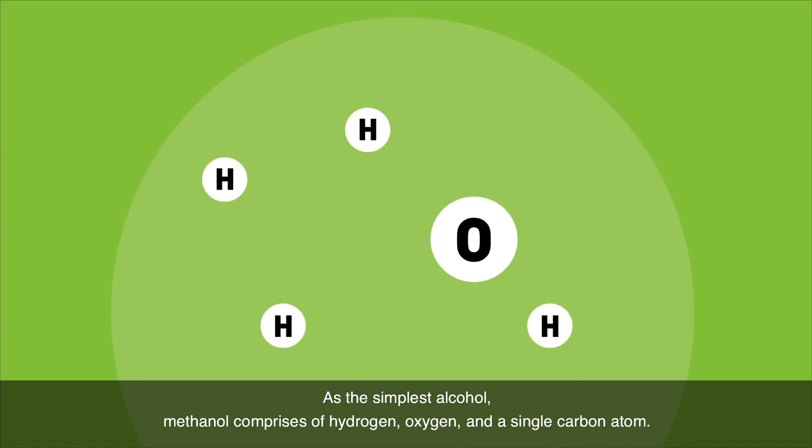In a fast-changing world, it is time to find innovative and efficient solutions to provide future-proof fuels. As the simplest alcohol, methanol comprises hydrogen, oxygen, and a single carbon atom. It has the highest hydrogen to carbon ratio of any liquid fuel. These chemical properties contribute to methanol's sustainability as a petrochemical feedstock and fuel.

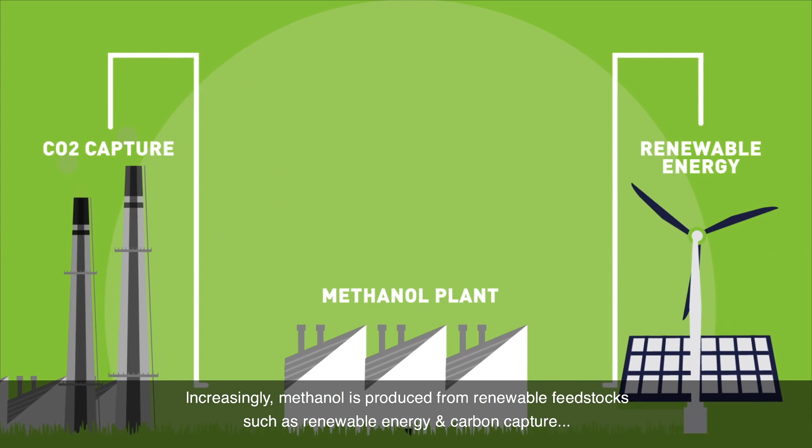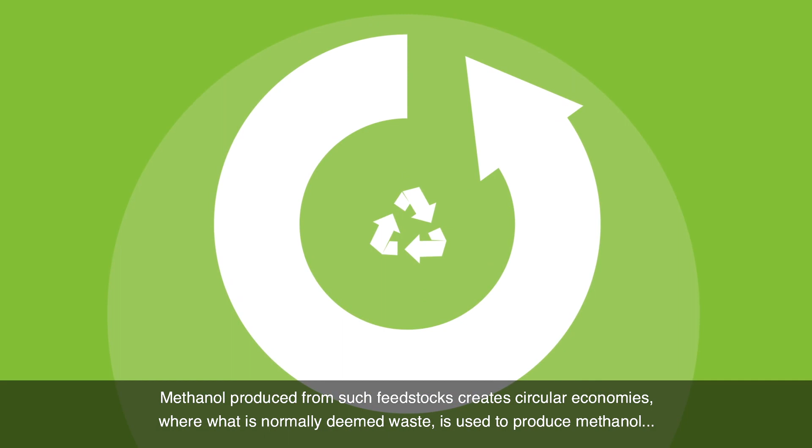Methanol is commonly produced from natural gas. Increasingly, methanol is produced from renewable feedstocks such as renewable energy and carbon capture, municipal waste, and agricultural waste. Methanol produced from such feedstocks creates circular economies, where what is normally deemed waste is used to produce methanol, a useful and higher value product. Such processes promote sustainability by creating value from waste and diversifying how waste is managed.

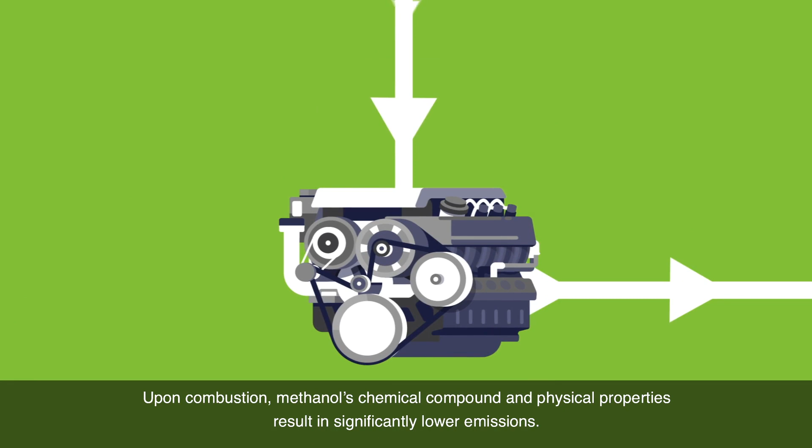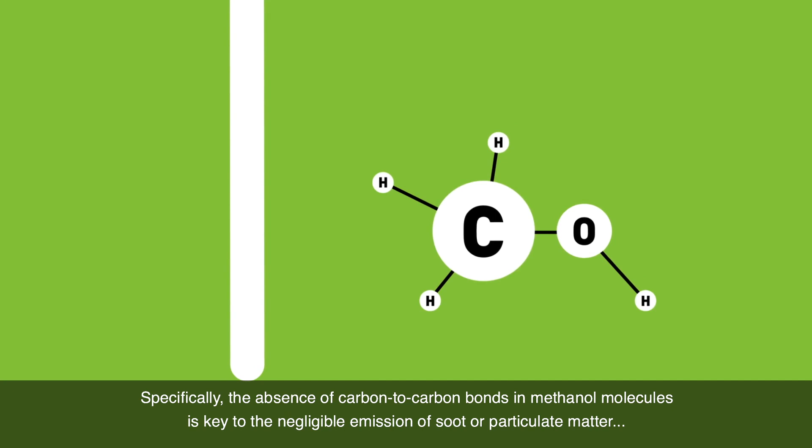Methanol is used to produce a wide range of ubiquitous products, such as materials for constructing houses, paints, plastics, car parts, and medical equipment such as personal protective equipment. When produced from renewable feedstocks, renewable methanol becomes a sustainable, net carbon neutral fuel, compliant with climate goals. Upon combustion, methanol's chemical compound and physical properties result in significantly lower emissions. Specifically, the absence of carbon-to-carbon bonds in methanol molecules is key to the negligible emission of soot or particulate matter, and the oxygen atom contributes to a fuller and cleaner combustion, making methanol an environment-friendly fuel that contributes to better air quality.

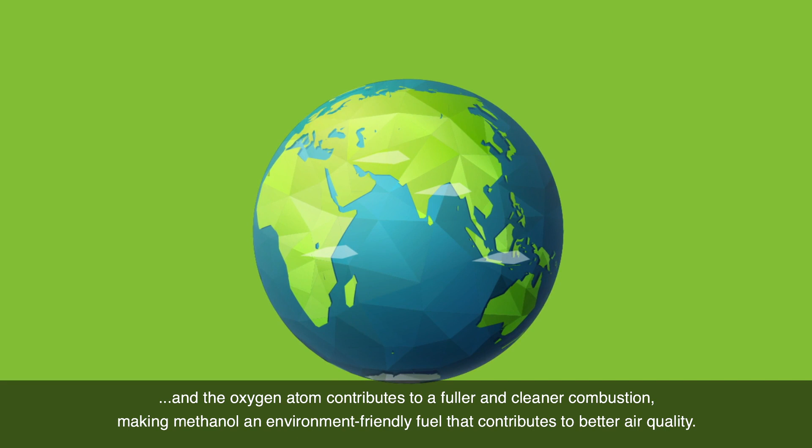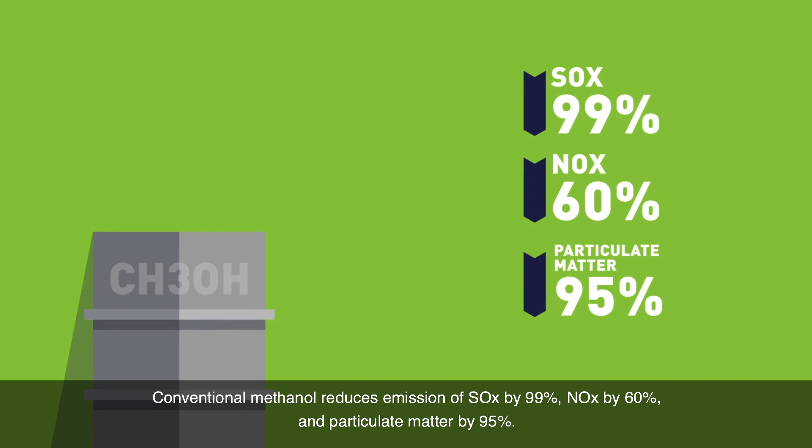As one of the most widely traded commodities in the world, methanol is available at more than 100 ports around the world. This reduces infrastructure costs for the marine industry to transition to methanol. Conventional methanol reduces emission of sulfur oxides by 99%, nitrogen oxides by 60%, and particulate matter by 95%. Net carbon neutral renewable methanol will meet the International Maritime Organization's goal of reducing greenhouse gas emissions by 50% by 2050.

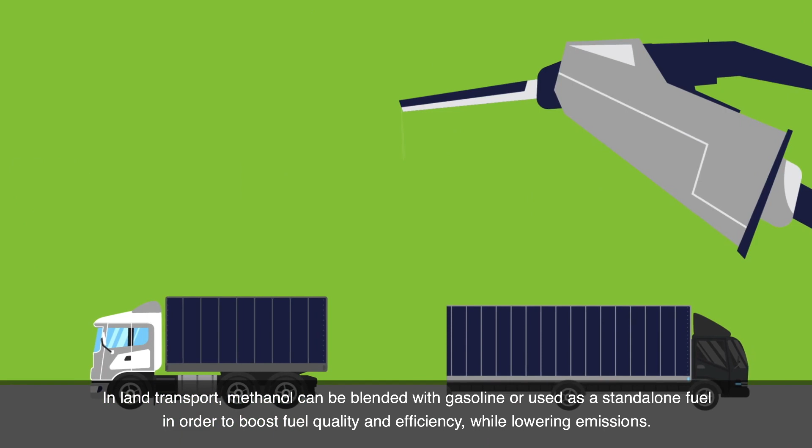In land transport, methanol can be blended with gasoline or used as a standalone fuel to boost fuel quality and efficiency while lowering emissions. To improve air quality with a cost-efficient solution, China is fueling land transport vehicles with pure methanol. Iceland is fueling a fleet of cars with renewable methanol. Italy is blending A20, a blend of methanol, ethanol and gasoline. This blend is being demonstrated in a car-sharing fleet with plans for it to be made available to consumers.

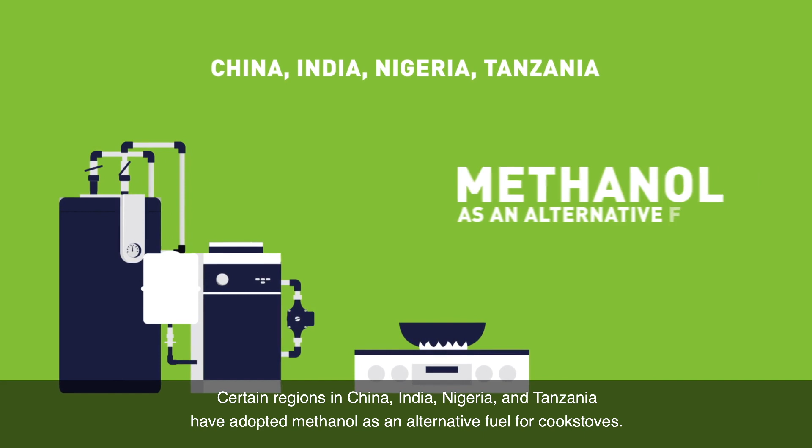The United States uses methanol regularly in motorsports. Certain regions in China, India, Nigeria and Tanzania have adopted methanol as an alternative fuel for cook stoves. Methanol's clean burning properties improve indoor air quality, lowering the risk of respiratory diseases.

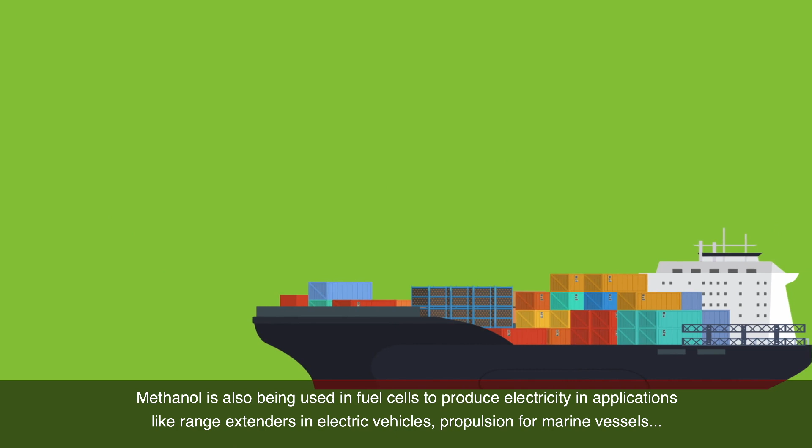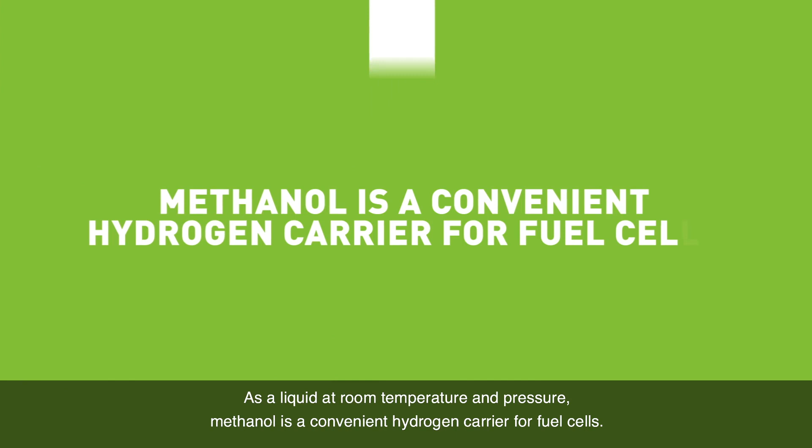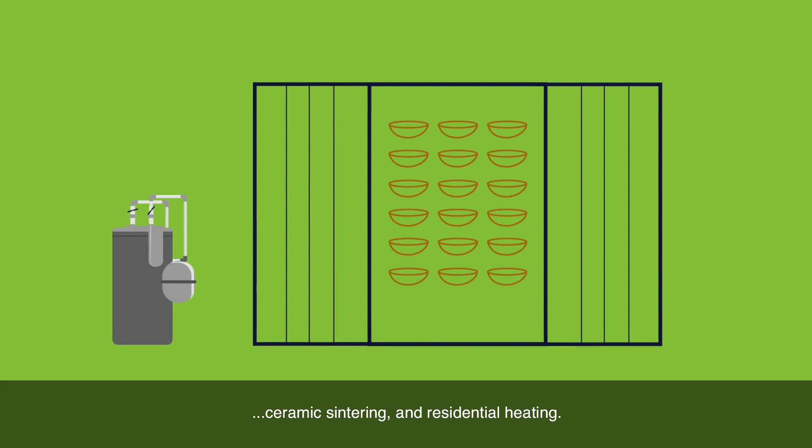Methanol is also being used in fuel cells to produce electricity in applications like range extenders in electric vehicles, propulsion for marine vessels, unmanned aerial vehicles, telecommunication towers, and military equipment. As a liquid at room temperature and pressure, methanol is a convenient hydrogen carrier for fuel cells. Increasingly, methanol is being used as a fuel in industrial boilers to produce heat or steam for the pharmaceutical and manufacturing industries. The methanol burner used in industrial boilers is also being used in other applications, such as producing heat for drying tea leaves or tobacco, ceramic sintering, and residential heating. As you can see, there are no shortages of available applications for methanol as a clean and net carbon-neutral fuel.

Methanol is the key to a more energy-efficient and clean future.

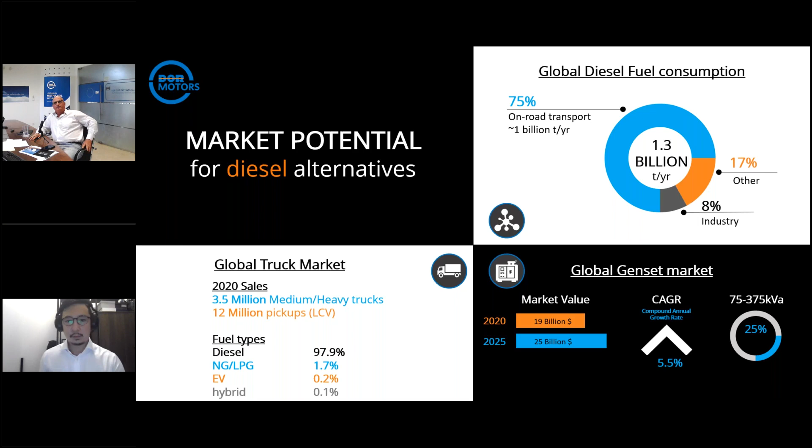Next slide. Okay, so, I mean, and still, as far as methanol, we do have to realize that there are some challenges to look into in order to make methanol an acceptable fuel. One has to do with the machinery, with the engine, and the other aspect is the chemistry.

We call it DOR mix. This is to say both the additives that we have to add to the methanol, as well as additives we have to add to the engine, like the special lubricants. And these I will now talk about.

I just lost you. Okay, sorry. So let's start with the generators. As I mentioned, it's a $20 billion market. And what we've done is we've been able to manufacture generators of both medium and small size, as well as large size generators that replace 100% diesel with 100% methanol.

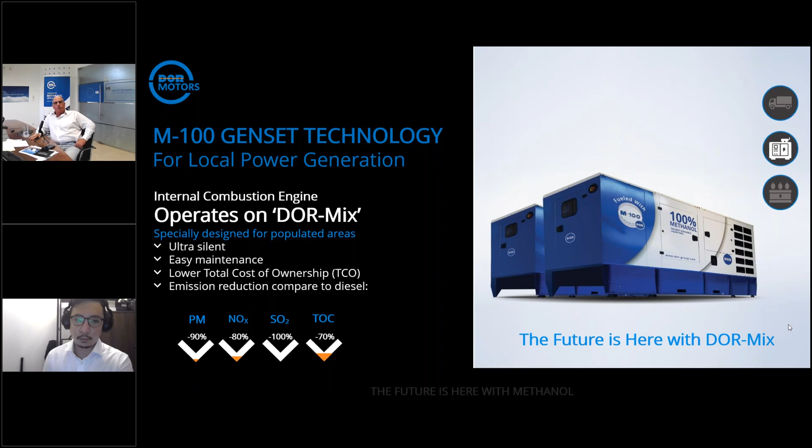What's very important to mention is that the total cost per kilowatt in both applications is reduced. Again, when we do the comparison, there are some markets where it will be much cheaper, and there are markets where the cost per kilowatt will be similar to using diesel. But altogether, the beauty of methanol—not only is it a liquid fuel, which makes material handling very easy and inexpensive—is that the total cost per kilowatt is similar to diesel, in some cases lower, and we received a significant decrease in emissions, which means that we can meet the necessary environmental demands without any extra cost. And this is the unique issue regarding using methanol, unlike other alternative fuels.

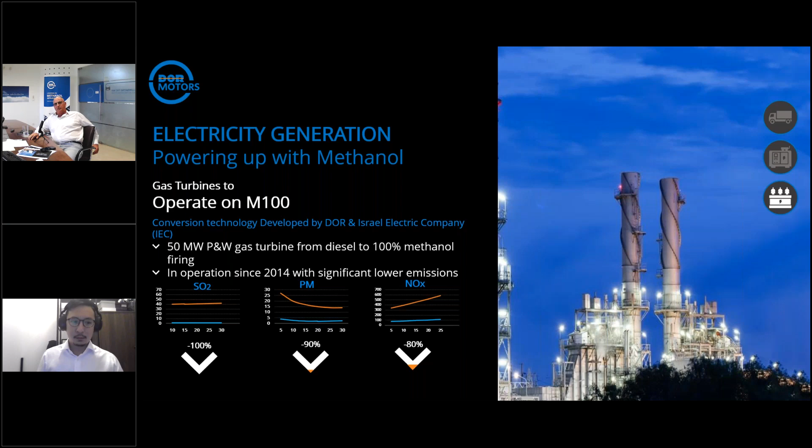It is running on 100% methanol, along with our additives, the DOR mix. It is running smoothly. By the way, both the generators and the truck, the noise aspect is lower than diesel, and also the maintenance is significantly lower than when using diesel, because methanol is a pure molecule and it's burning very cleanly.

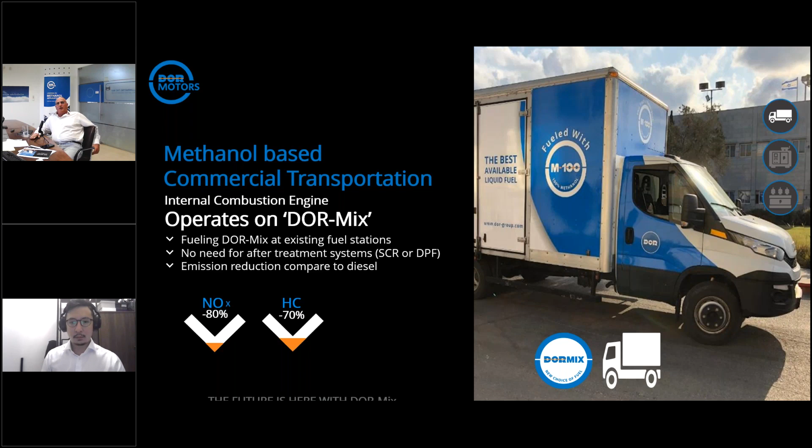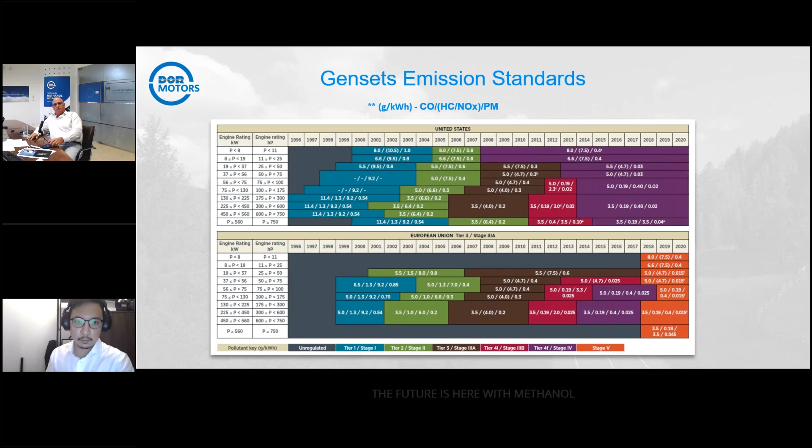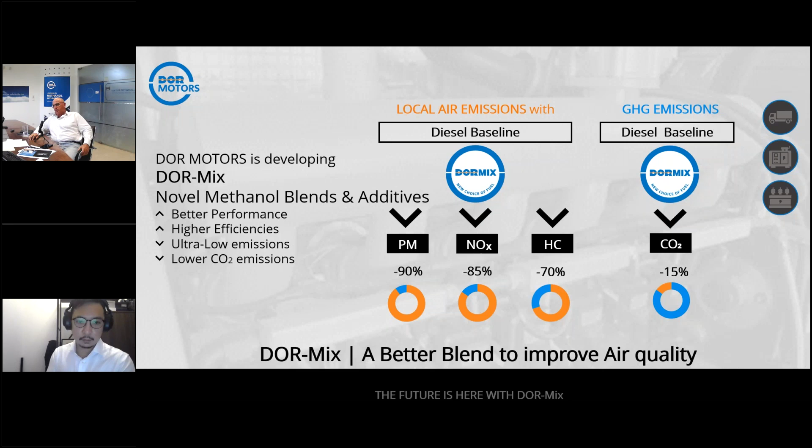So what are the challenges we are facing? We do need to do some modifications to the internal combustion engine. There is the issue of material compatibility throughout the chain. Methanol has its own properties, and we need to understand the chemistry in order to overcome corrosion and wear. There are issues of health and safety.

I mean, when methanol is burned, it burns almost in a way that you cannot see it, so there are precaution issues that we have to take care of. And obviously, we have to provide the methanol supply chain and make sure that it's there. Otherwise, no one will be interested in using it.

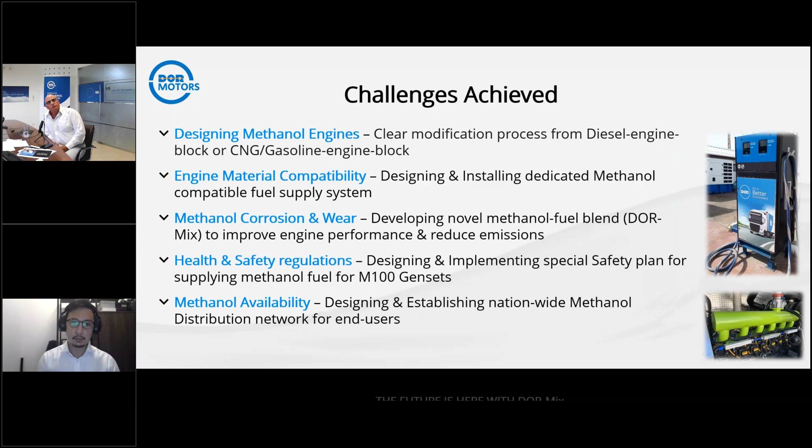I would like to take just a few slides also to mention the work we've done with Fiat Chrysler as far as fuel blending, 15% methanol in gasoline, where actually the major advantage was that there wasn't any significant change we had to make in the overall sedan in order to utilize M15.

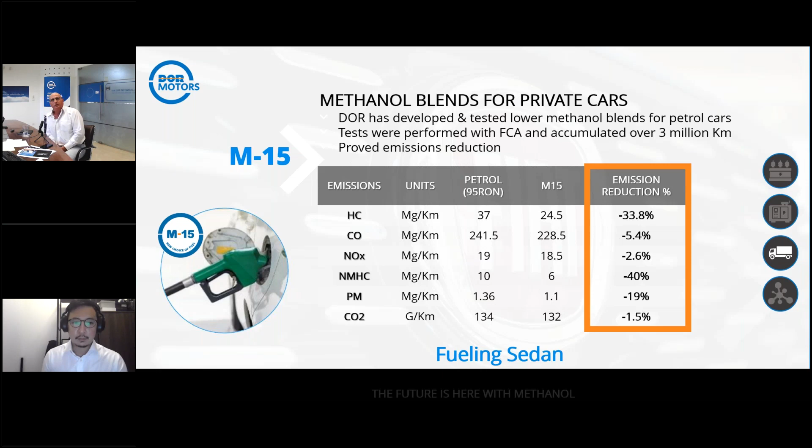These are the M15 fuel standards which we first started introducing in Israel, later on in Italy, as well as India. And obviously, this is a fantastic achievement.

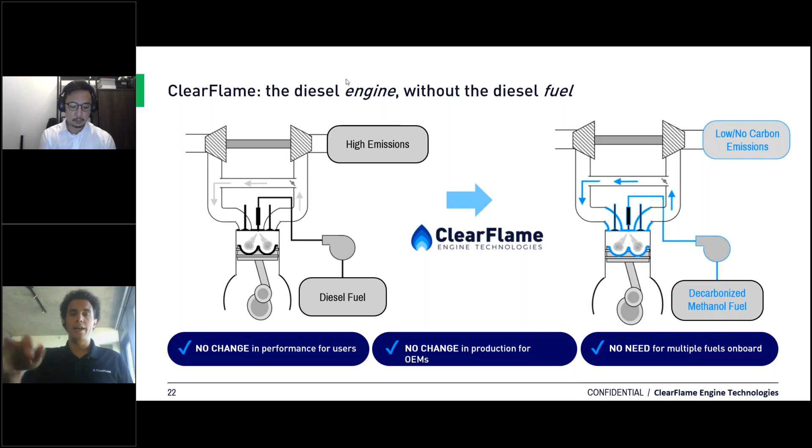We have run both ethanol and methanol in the past, by the way. We've been able to demonstrate that we can hit all of those operating points without the need for any diesel fuel, and the stock methanol that is already out there and available, whether it's mixed with gasoline, mixed with water, or any other potential impurities. We've proven the technology on the Cummins engine platform, and we are putting it into trucks on the road in the fourth quarter of this year.

So what this technology enables, in terms of its value proposition pillars, are really three core attributes that are critical for cost effectively mitigating emissions from the heavy duty sector. First and foremost, this has to be a low cost solution. Total cost of ownership has to pencil, which means you can't require a lot of upfront capital, either on the equipment or the infrastructure, and you can't increase operating costs with higher fuel costs.

Similarly, we need solutions that are fast to implement. There's a lot of work being done on solutions that might be relevant in the 2040 to 2050 timeframe, but if we're serious about hitting our emissions goals, we need alternatives that are ready to go now. And to be clear, this can be compliant with any emissions reduction norm, as Gil was just mentioning - Euro 6 transitioning into Euro 7, what's happening here in the United States or in California at CARB.

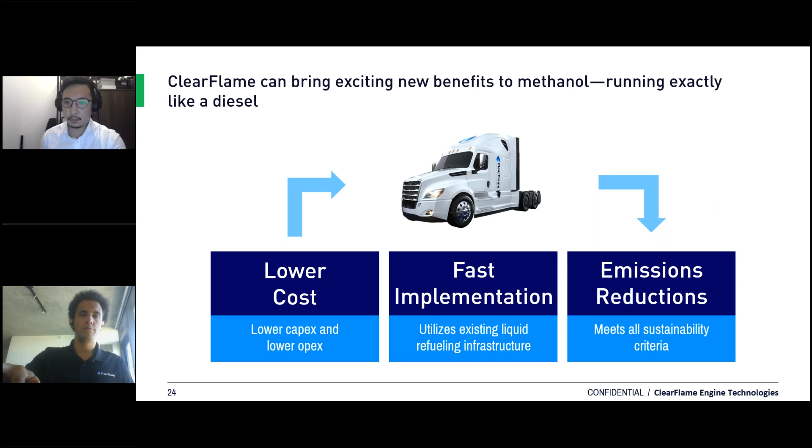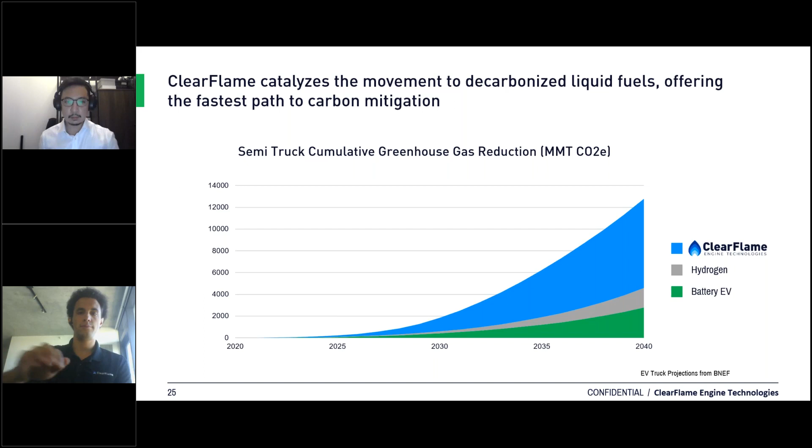And circling back to the economic case, again, while we are focused on emissions reduction and sustainability, solutions do not get adopted in these commercial sectors - the ones that are most reliant on diesel engines - unless they save operators money. Margins are very thin, and people simply cannot pay extra to go green.

And this is really one of ClearFlame's biggest advantages. By not adding any complexity to the truck itself, while also using low cost and readily available fuels, we can offer a lower total cost of ownership, meaning there is no longer a green premium to reduce the emissions of your operation.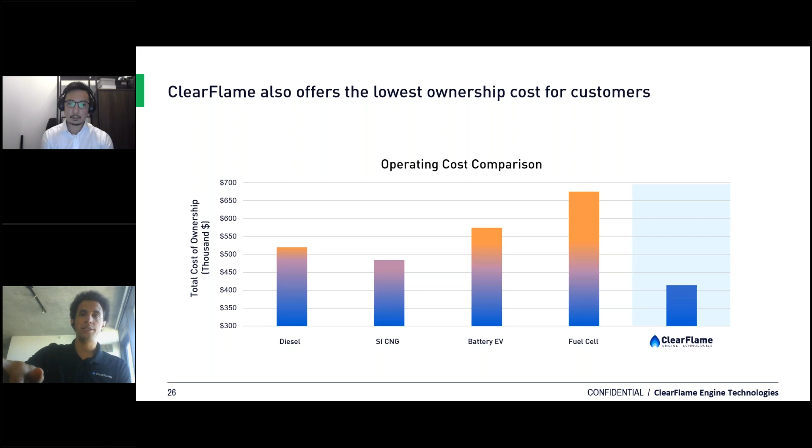This, of course, is critical for accelerating adoption of drivetrains in cities that can improve air quality. So a lot of the focus in the world today, and in the presentation so far, has been on carbon, but knowing that we can improve soot, SOx, NOx, and all the other human health concerns associated with diesel is a major benefit that can't be overlooked.

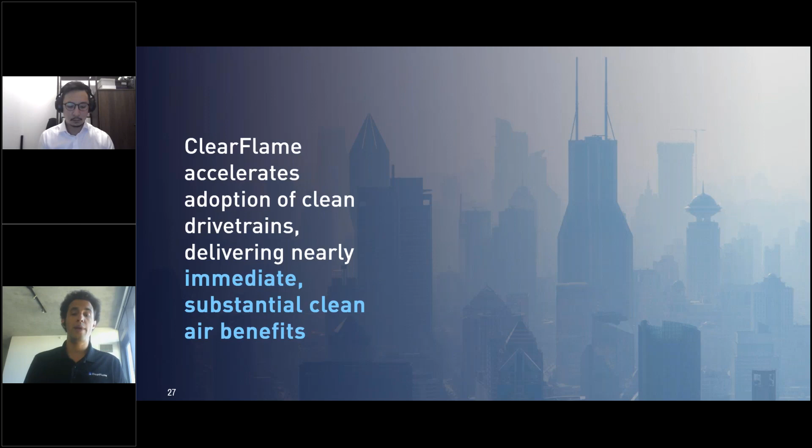Now, I've talked about this technology mostly in the context of trucks, but I do want to indicate that this is capable of being used anywhere a diesel engine is used today, which includes not just trucks, but off-road equipment like construction and agriculture, and solutions like diesel generators.

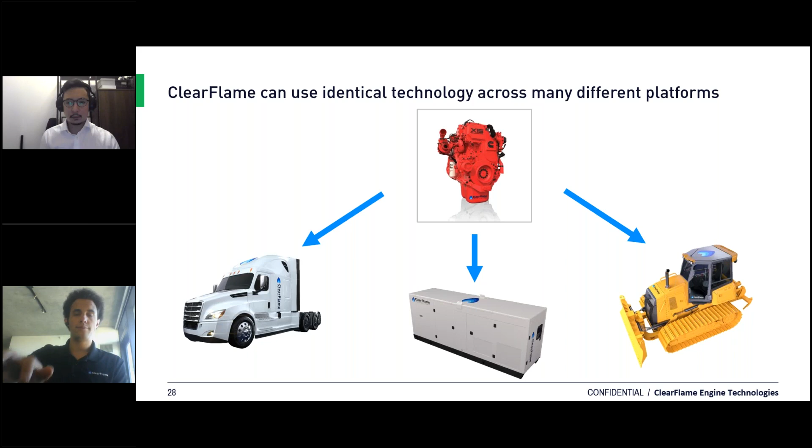This, of course, is a massive market opportunity, both in terms of the commercial revenue that we can get from product sales, but also major new markets for fuels like methanol, as they all seek to displace diesel fuel in parallel.

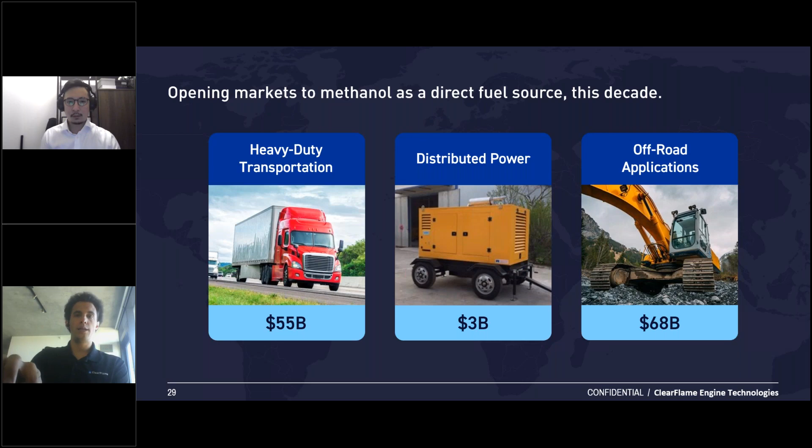So, with some concluding remarks today, I want to share a few thoughts on how I think ClearFlame has a chance to collaborate with the methanol ecosystem going forward. As I mentioned, we're going to be putting our first 2 trucks on the road in Q4 of this year, and we have partners lined up here in the United States to test those trucks, in this case using ethanol fuel, because in the United States that's where we've lined up our fuel partners. We would love to be able to expand this into international opportunities, or domestic opportunities, where using methanol might be the preferred alternative to ethanol.

These trucks are ready to go. We just need the fuel partner and the fleet that's ready to test them on another fuel besides just the ethanol alcohol.

Also, we have a demonstration planned in 2022 in a microgrid. One of the things that has been of great interest here in the United States of late is grid resiliency - what happens as we get lots of wind and lots of solar, and there becomes fluctuation in the electrical supply available on the grid? Historically, those demand fluctuations have been met by things like diesel generators or natural gas peaker plants.

Using a technology like ClearFlame's, you can operate at very high efficiency and provide on-demand power, but without the emissions and cost challenges of diesel fuel, by using that lower cost alcohol. Again, this is currently a US demonstration planned with ethanol, but we would love to get a parallel demonstration on methanol going as well.

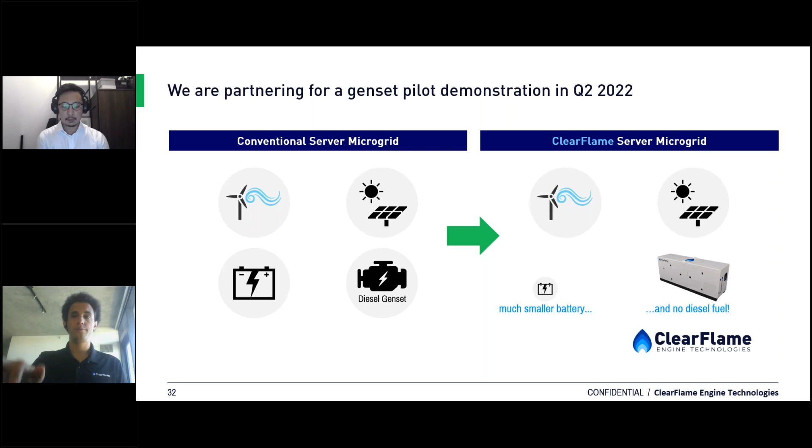And finally, I should point out that this is not just about new engines and new equipment. There are millions of diesel engines on the road and in fields that will persist for decades. A solution that is fundamentally retrofittable, like ClearFlame's, is important not just to slow the expansion of diesel going forward, but to do something about those assets already in the field that will remain big polluters unless we find a retrofit alternative.

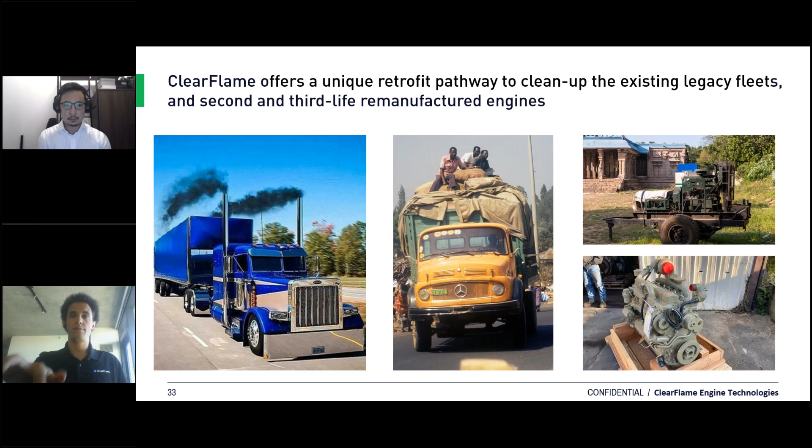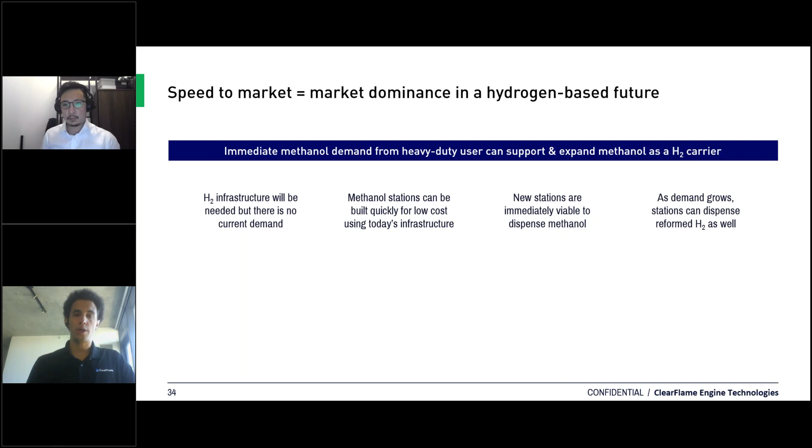So, wrapping up, at ClearFlame our vision is to provide an easy to adopt, fast to market solution that can enable rapid carbon mitigation without sacrificing any heavy duty performance. We can do that without a lot of infrastructure development, without decarbonization of our electrical grid, and perhaps most importantly, without requiring users to change the way they're getting their jobs done today.

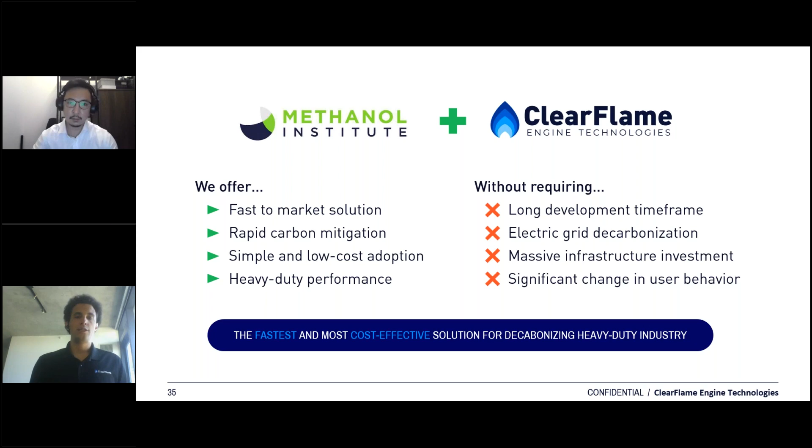So thank you very much for your time. I look forward to taking any questions at the end of the presentation and exploring how ClearFlame can work with the methanol sector to prove there's a faster and more cost-effective way to decarbonize heavy-duty industry.

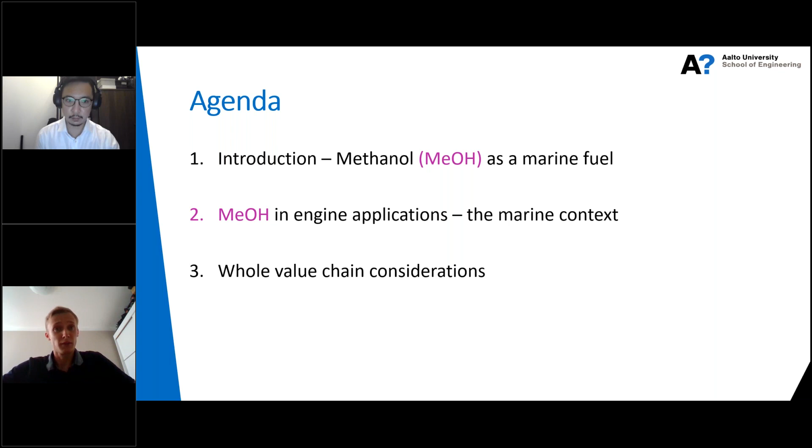Okay, so let's start, I think that should work. So I will focus on this end-use application, but also I will give you some highlights regarding our other activities related to the whole value chain considerations of methanol.

The previous speakers introduced methanol pretty well and highlighted the benefits, so I think it's clear that methanol is a very promising option. But I'd like to start with this figure where we have a pyramid representing the challenge of decarbonization of transport. If we go to the bottom of the pyramid, we see that readiness of electrification is pretty high, especially for light-duty vehicles or rail. But if we go to the higher levels, other sectors, then we highly need liquid or liquefied fuels.

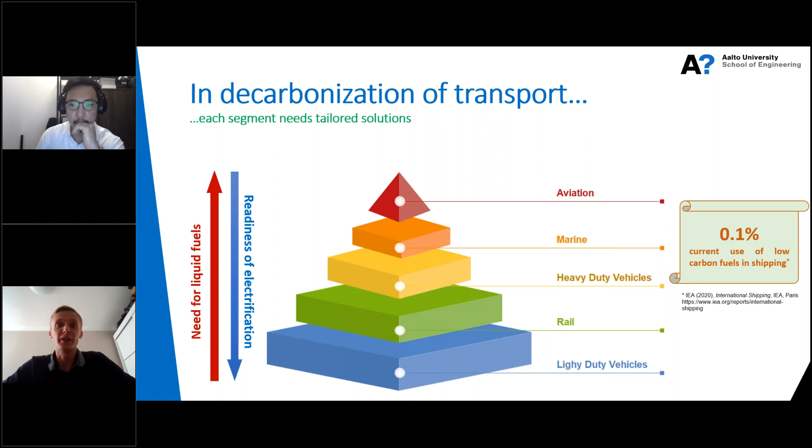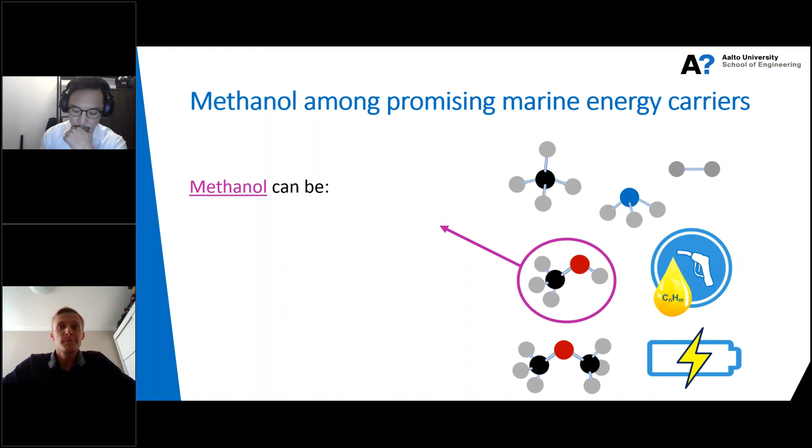Focusing on the marine sector, at the moment there is a huge room for activities in decarbonization. Currently we have only 0.1% of low carbon fuels, so that's a very big room for greening solutions. For shipping, we have a few options, like liquid biofuels, electrofuels, and maybe some forms of hybridization. But from this perspective, we picked methanol as one of the most promising options for marine transport.

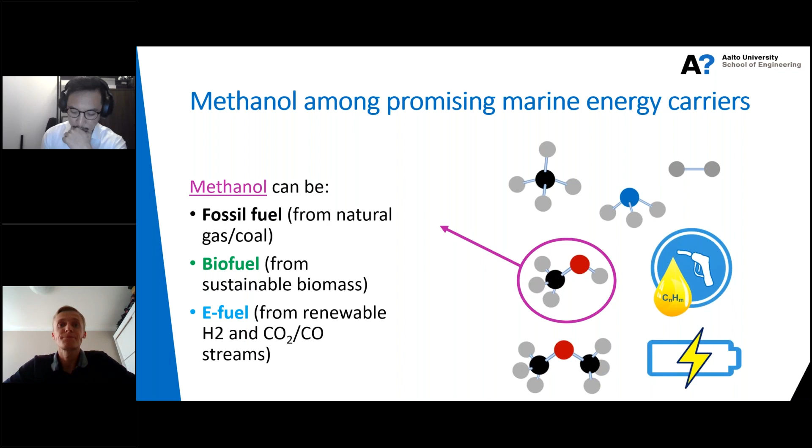Of course, methanol at the moment can be fossil-based. Currently almost all production comes from natural gas or coal. But in the future, what we could expect is the growing importance of biofuels and electrofuels, so in that way we can also produce methanol. That's the huge merit of methanol.

Here I just listed the most important advantages of methanol. There's the liquid state at ambient conditions, important from a storage perspective for shipping, and we already have partly ready infrastructure in big harbors. Apart from that, methanol is miscible with water, biodegradable, and far less toxic than heavy fuel oil, for instance.

Of course, as with all new technologies, we have some challenges to be properly addressed. One is related to the energy density of methanol, but it can be overcome, for example with bigger onboard tanks, maybe some additional safety measures on board, and of course cost. That's something I think should be properly addressed in the future.

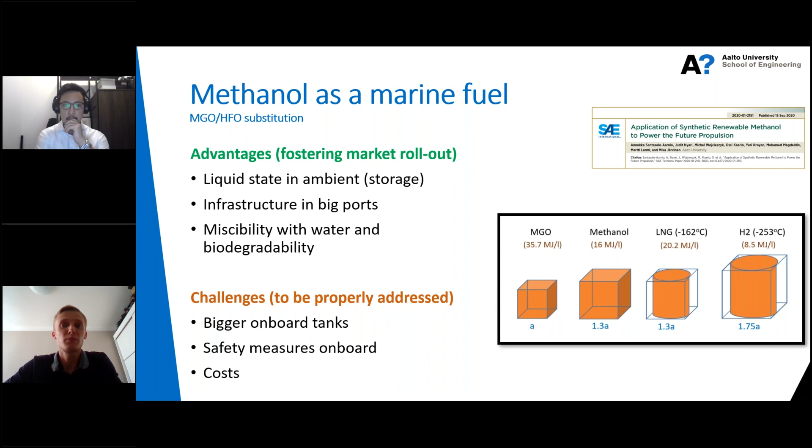But now let me move to the core part of this presentation: methanol combustion in compression ignition engines. For shipping purposes, due to the very high efficiency of compression ignition engines, we can try to use methanol in two different concepts. One is direct injection of methanol.

Here we can have some ignition improvers blended with methanol, or direct injection of methanol followed by pilot diesel injection. The second concept is port fuel injection, where we have either conventional dual fuel combustion or reactivity controlled compression ignition combustion.

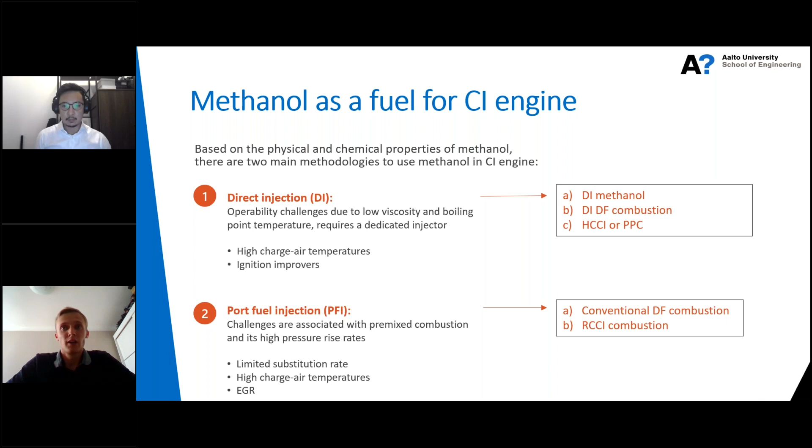How are those concepts represented in the market? There are already some commercially proven technologies. In the marine sector, we could see, for example, the Wärtsilä direct injection system in the 4-stroke medium-speed engine, successfully demonstrated. Then we have 2-stroke low-speed engines from MAN, also using direct injection.

And there is also another concept, port fuel injection, where we have diesel direct injection combined with port fuel injection of methanol. Of course, so far there is low market penetration, but we can observe big environmental gains compared to marine diesel, for instance.

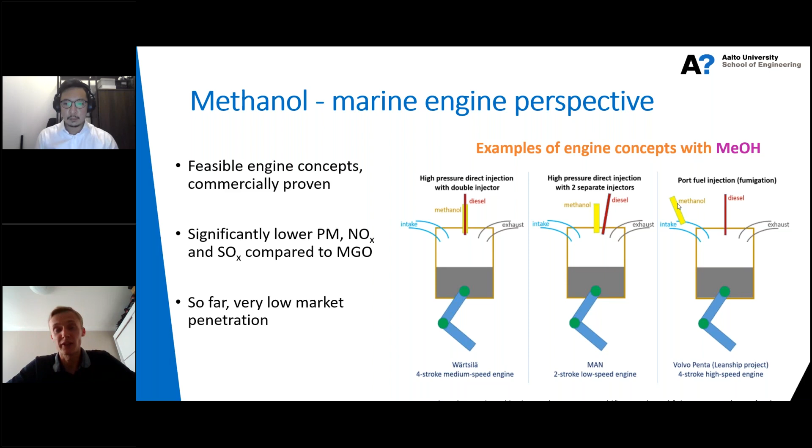And how can we, as a research institution, support these activities? We are trying to lead experiments and understand the physics inside the combustion chamber. Here is one example we tried with direct injection.

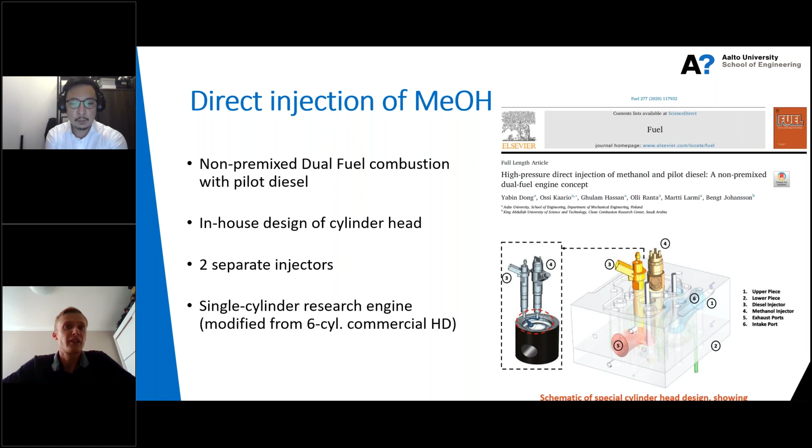This is the first concept I introduced: direct injection of methanol with non-premixed dual fuel combustion. What's interesting here is that in our group we designed our own cylinder head with two separate injectors, using a modified single-cylinder research engine in our lab.

The key results from this experiment: we reached 44% thermal efficiency. It turned out that methanol, as a main fuel at high loads, can lead to stable combustion and robust ignition characteristics, increased thermal efficiency, and lower local emissions like unburned hydrocarbons and carbon monoxide.

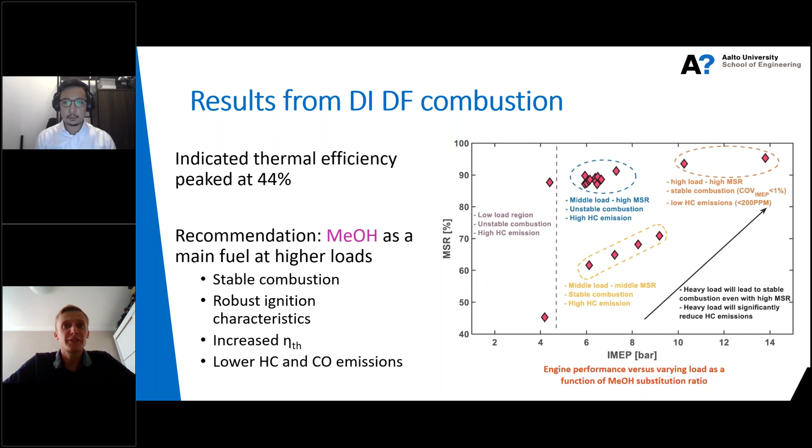Those results are already available, so we could check in the references. Currently, these experiments are followed by simulations. Now we are trying to understand the physics inside the cylinder for this new concept, and the results we're obtaining will serve for further dual fuel and methanol simulations.

Here are some insights on the modeling we did, the simulations with methanol direct injection. As you can see, the simulation pretty nicely mimics the experimental results when it comes to cylinder pressure and heat release rate.

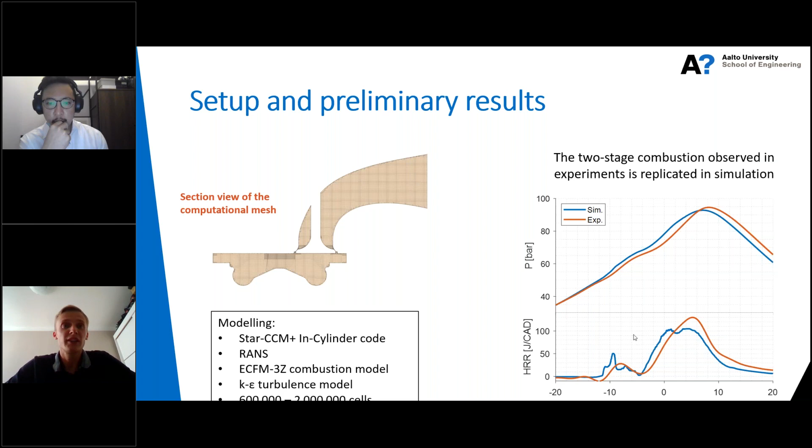Okay, here I would like to show you the animation of direct injection of methanol. You see the temperature isosurfaces and particle diameters. First we have the pilot injection of diesel, the ignition of diesel, then injection of methanol as the main fuel, and ignition of the whole mixture.

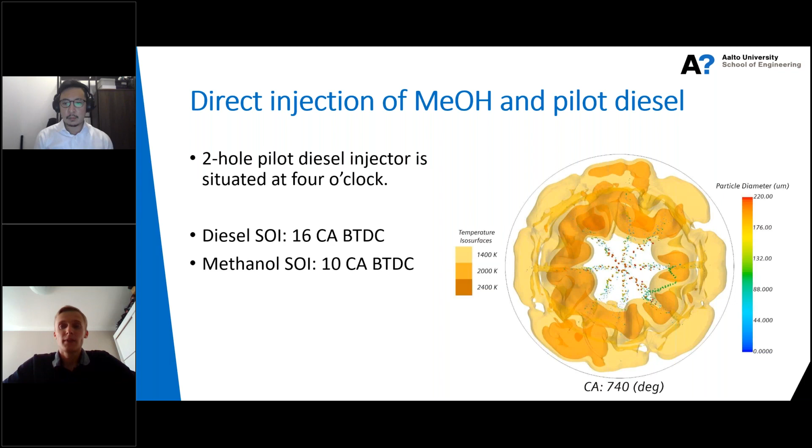So the previous slides were related to direct injection. Now I will say a few words about methanol port fuel injection. It's a more conventional dual fuel concept, but we have done one innovation here with negative valve overlap.

Some portion of the exhaust gases are trapped inside the cylinder, functioning as internal EGR, or internal exhaust gas recirculation. The results are not published yet, but are very promising. We obtained pretty stable combustion with quite high thermal efficiency and pretty low emissions, with very high methanol substitution—meaning how much diesel is substituted by methanol.

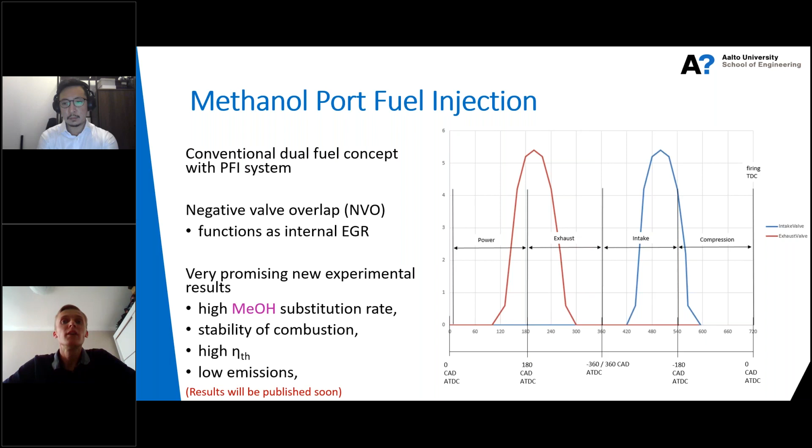Here you can see more insights. Pilot ratio is 10%, and engine load varies from 40 to 80%. We see very high combustion efficiency and also very high thermal efficiency, reaching at the highest point almost 56%, while at the same time having lower local emissions.

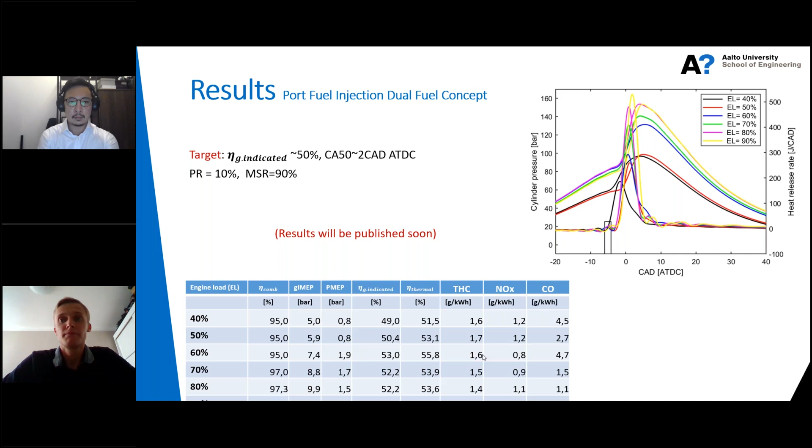Now a few words about more fundamental studies. As you might know, the spray is a very critical parameter for compression ignition engines, which affects engine efficiency. We were also studying, two years ago, how methanol spray behaves in the combustion chamber. The conclusion was that we have relatively similar spray behavior in terms of spray penetration and opening angle compared to light fuel oil, but methanol has smaller droplets than light fuel oils.

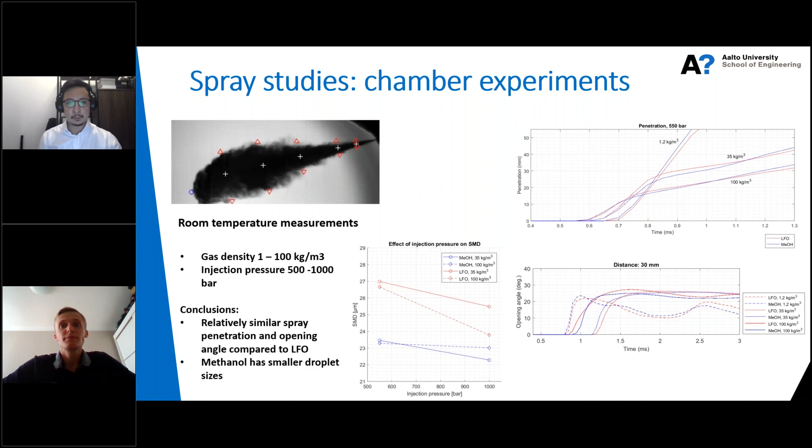Those experimental studies were accompanied by large eddy simulations to understand the fuel spray mixing and evaporation. The simulations were pretty in line with experiments, so there were no big differences between light fuel oil and methanol fuel, but the lower temperature within the spray was caused by the higher heat of vaporization for methanol.

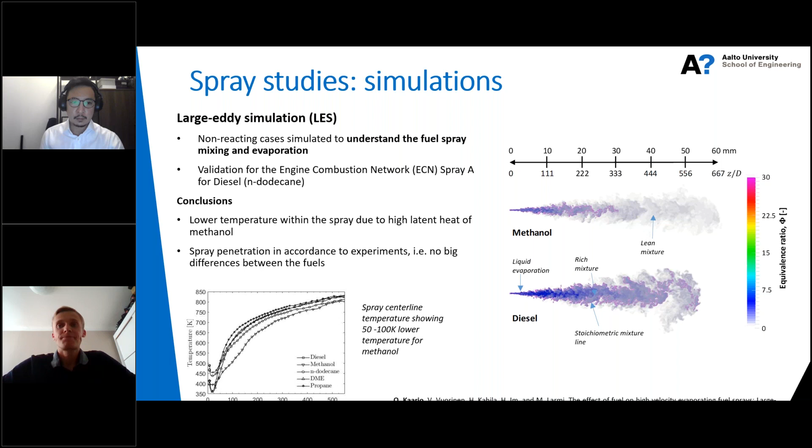At the end of my presentation, I'd like to give some highlights regarding the whole value chain assessment. In our research group of energy conversion, headed by Professor Martti Larmi, we covered the whole value chain related to energy carriers, starting from conversion, then use and recovery. One important aspect when we speak about methanol as diesel substitution is where our renewable methanol will come from.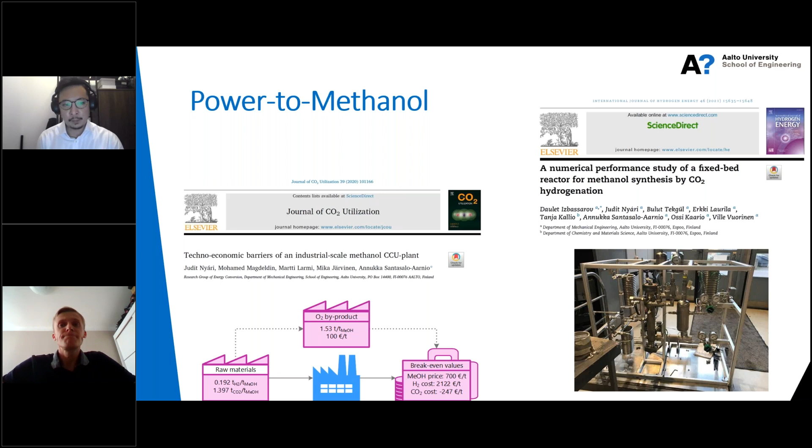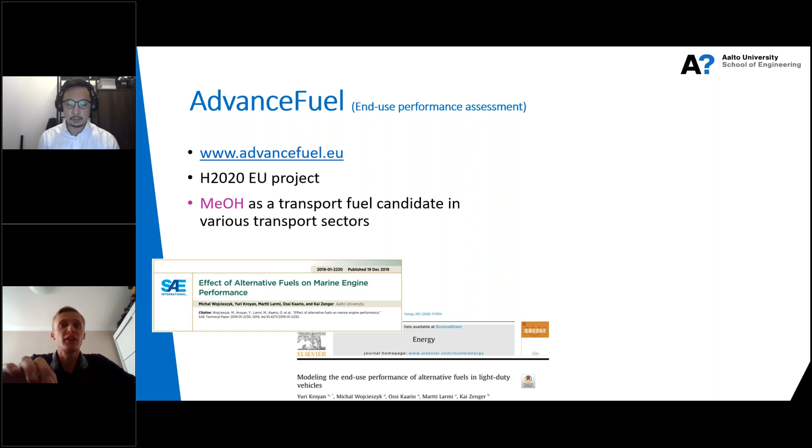Then going to the end-use performance assessment, we contributed to the Horizon project funded by the EU Commission. You can find more information on the website, and methanol was identified as one of the most promising transport fuel candidates. In the AdvanceFuel project, we created a tool which can assess different fuel options from the end-use perspective, including methanol.

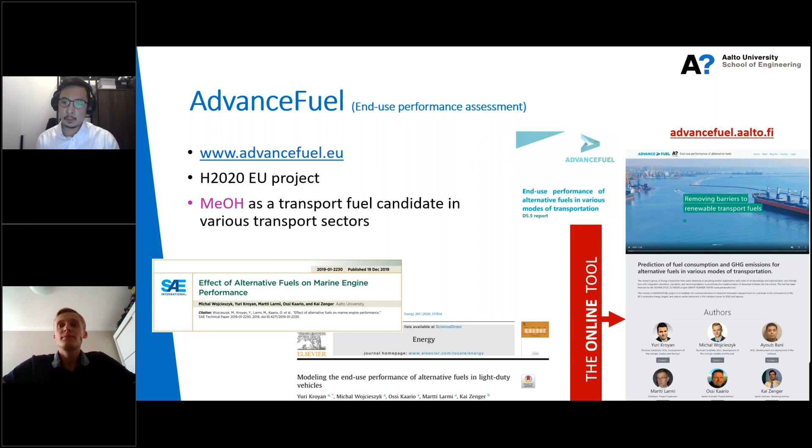Finally, as we have both production and end use, we also need legislation in place and an appropriate environment to support the market uptake of methanol. In the AdvanceFuel project, we have good collaboration with other partners related to all value chain parts, where we identified the most significant policy gaps and what interventions are needed. Upcoming work will also identify methanol as a key fuel for hard-to-abate sectors, especially maritime.

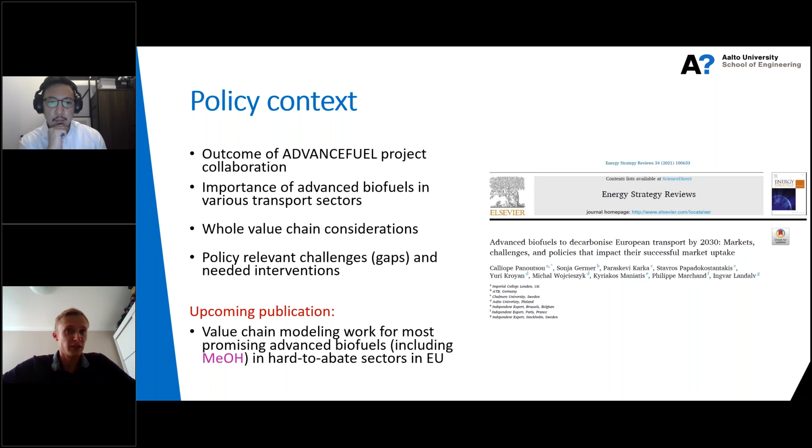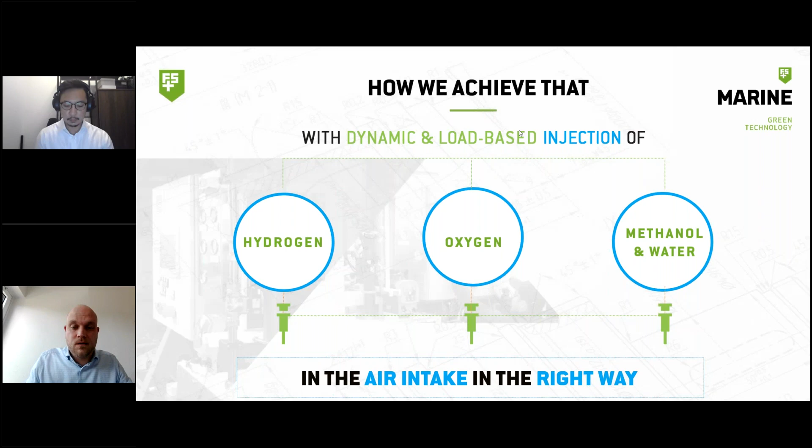We inject those 4 additives into the intake of the engine, and by that we achieve several very positive aspects, which have already been described technically by the presenters before. What we can influence with these mixtures is the flash point, the combustion temperature, ignition timing, reaction efficiency, the premix phase, and other aspects.

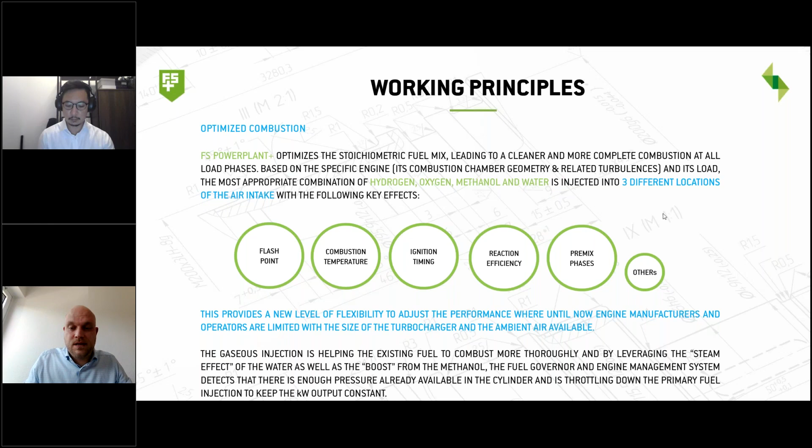So in total, what we do is inject the right amounts of additives at the right time according to the engine load into the air intake of the engine, so that we cool down the intake temperature of the engine and help the ignition process, especially in the combustion process, to become more comprehensive and efficient.

So I will skip those technical installation details.

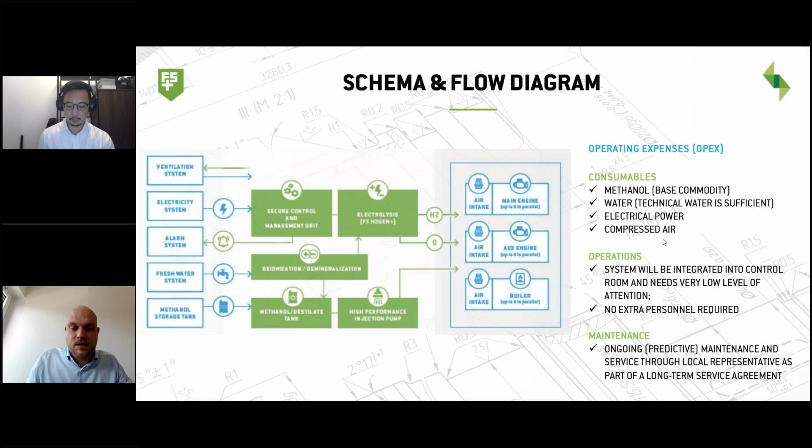What we achieve for our customer for the installations that we do: in first installations with prototype installations on smaller engines, we had up to 25% of primary fuel reduction, meaning that 25% of the primary fuel, in this case diesel, had been cut due to our injections. We have tremendous maintenance and cost reduction coming from the reduced engine wear and tear.

We clean even the engine from the inside. This happens due to the hydrogen, small steam explosions in the combustion process. We had clear lube oil prolongment in the use of the lube oil.

We can reduce carbon dioxide by up to 15%, due to the reduction of the primary fuel, and up to 40% in particulate mass reduction. SOx reduction, of course, also related to the primary fuel reduction. We are very, very good at NOx reduction with the cooling effect and also the water that we utilize, achieving NOx reduction up to 80%. And resulting from this particulate mass reduction, we have up to 33% of black carbon, or what you call smoke, reduction.

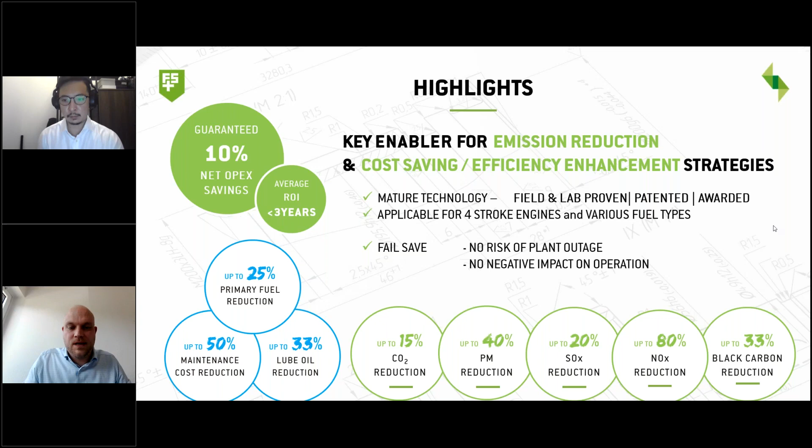So this is more or less the same numbers. I will skip this for now, leaving you more time to ask questions.

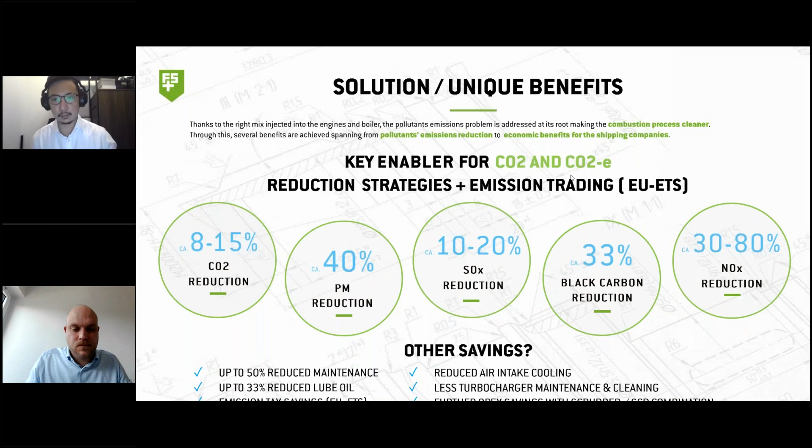Our technology, we are still a startup, but our technology has been tested and field proven on an installation starting 2015, for 2.5 years, meaning a real operated engine on board of a vessel, the MV Annette. It's one of the largest heavy lift crane ships in Europe. There we achieved around 16% net OPEX savings.

We reduce the primary fuel by a certain amount and are deducting all the operating material costs for electricity, for methanol, and even fresh water and compressed air. Meaning from the 25% gross savings we had on that auxiliary engine, we really had 16% in net cost savings, which is really a huge and great outcome for an additive setup.

We also did, of course, some inspections. We wanted to assure and prove and demonstrate that the engine itself is not harmed by the additivation with methanol. This has been approved by a renowned servicing company for this Volvo Penta engine, where we did the installation, and was also confirmed by the classification society approving this ship and the inspections, the DNV GL.

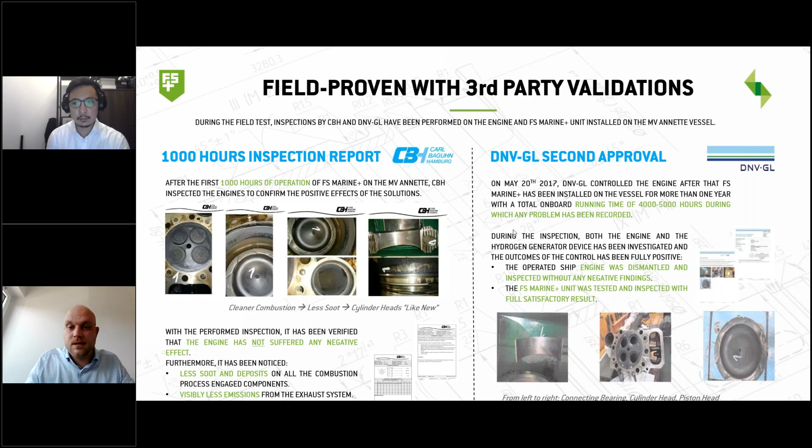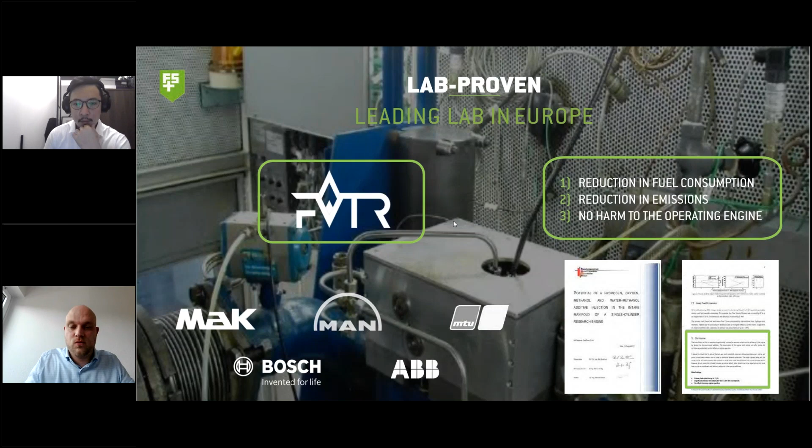Our solution has also been lab proven by one of the leading labs in Europe, where all the big engine manufacturers test their engines, hardware retrofits, new lube oils, or additives to lube oils. There we also received confirmation that our technology is not harming the engine in operation. In contrary, it's contributing to a longer engine lifetime and more harmonic operation.

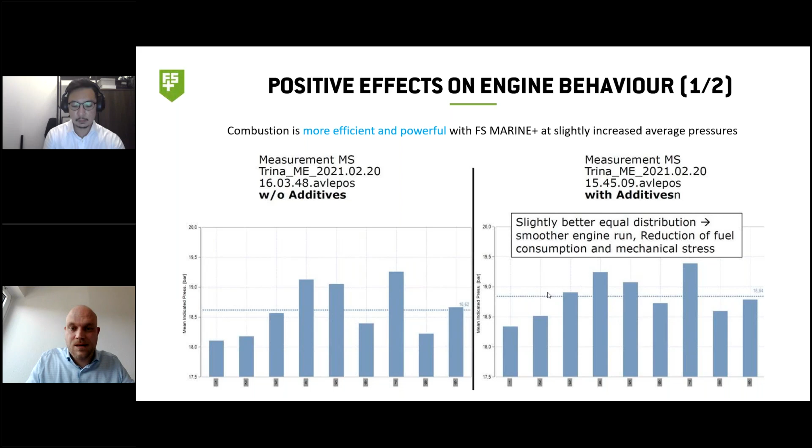This outcome has been demonstrated not by us, but by AVL, one of the largest engine builders and designers throughout the whole industry, at least in Europe. They stated a better equal distribution of the fuel within the cylinders, a smoother engine run, and reduction of fuel consumption and mechanical stress. That is what methanol is able to really achieve within an engine.

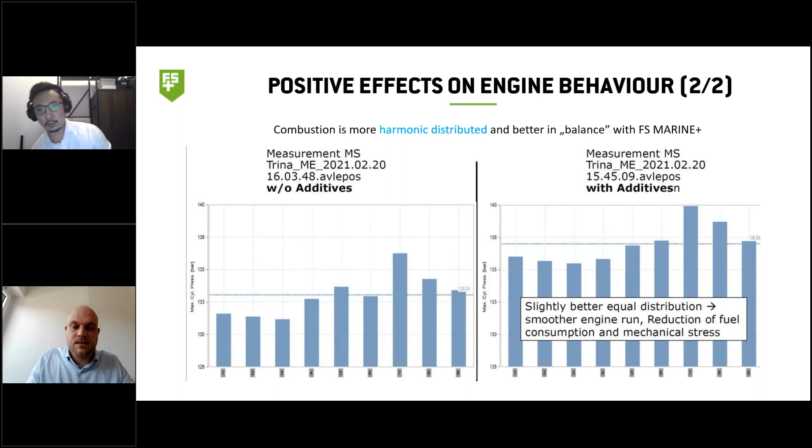This is the same chart, only for the peak pressure. We have slightly increased maximum cylinder pressures, which you can see on the right side. This is an indication of higher efficiency of the combustion process.

Now I want to talk about what we are doing, because we are doing current and actual installations of our technology. Our second project after the big pilot project in 2018 is a contract we signed with Van Oord, a very renowned specialized shipping company in the maritime business. We are installing our technology on 4 engines with a total power of 16 megawatts. This is a large engine installation, and we include our own customized methanol storage tanks on board the ship, because storage is the typical issue you have with methanol on ships. We have solved that problem, and this will be the first installation of our customized design tanks on a Van Oord vessel.

And just yesterday we received the purchase order from Seadrill, which is also a renowned drilling company. That installation will be even bigger — we will install our technology on a combined 48 megawatts of engine power, meaning 6 engines with 1 methanol storage container. This will happen by the beginning of next year.